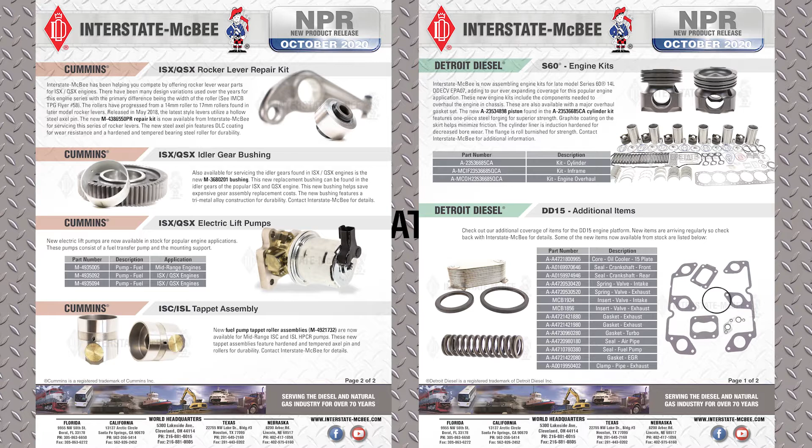So let's get started here with the October new product review. There's an overview of what we'll go over today. So we have some Detroit Diesel items and some Cummins items to talk about.

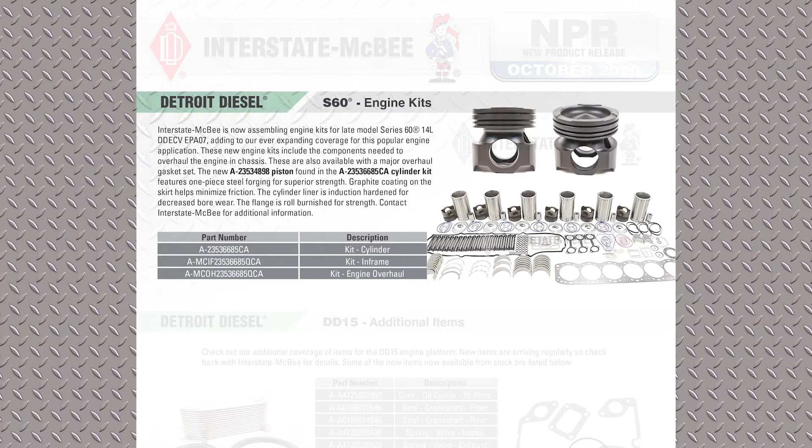The first one is for the Series 60 14-liter engine. These fit the DDEC 5 EPA 07 14-liter engine. And this is a monotherm single-piece piston. So you have a forged piston there, induction hardened cylinder liners, and all the features and benefits that we have been selling for the Series 60 for a number of years. This is just the later iteration of that engine. If we don't have the best coverage in the industry now, we're certainly close to having complete coverage for that engine series. But again, if there's something else we need to add to our product line, please let us know.

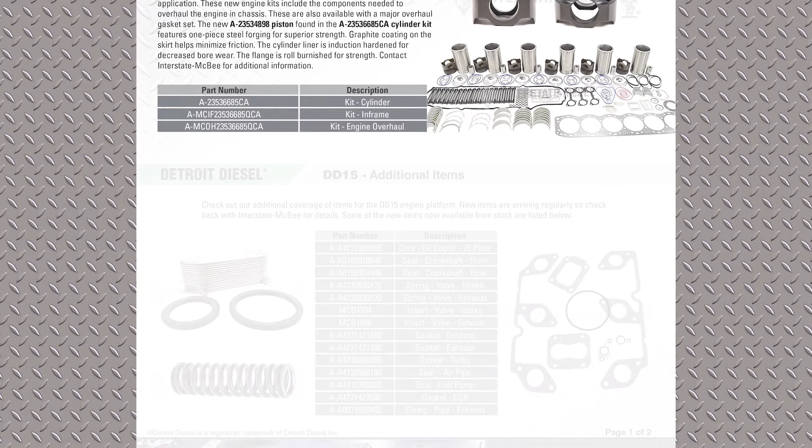Next, let's talk a little bit about DD15. We've added a lot of items for that engine, so this is just kind of a catch-up list for the highlighted parts that have been added. There's some crank seals on there. There's an oil cooler core. The inserts are going to be a good product, I think. So let's just talk about those for a second.

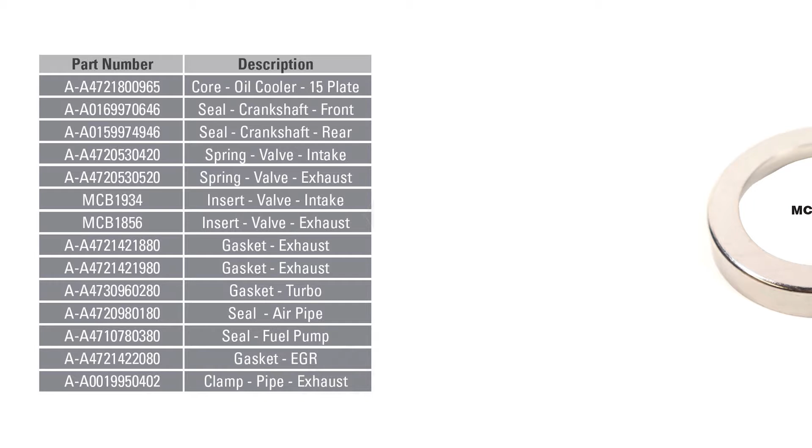The DD15 cylinder head, the OEM does not offer many traditional replacement parts for that head separately. So if you're changing valve guides, which are high wear items, obviously, and the valve inserts, you cannot purchase those from the OEM. So we developed the MCB 1856 and MCB 1934 valve seats for that reason. And they're pictured there upside down, but you can see them.

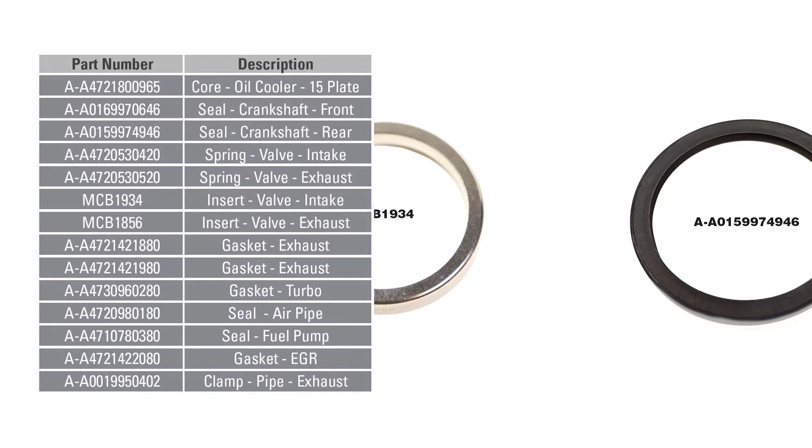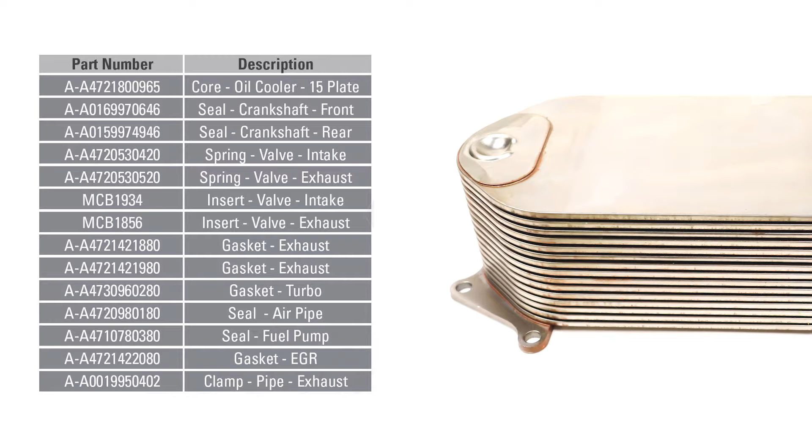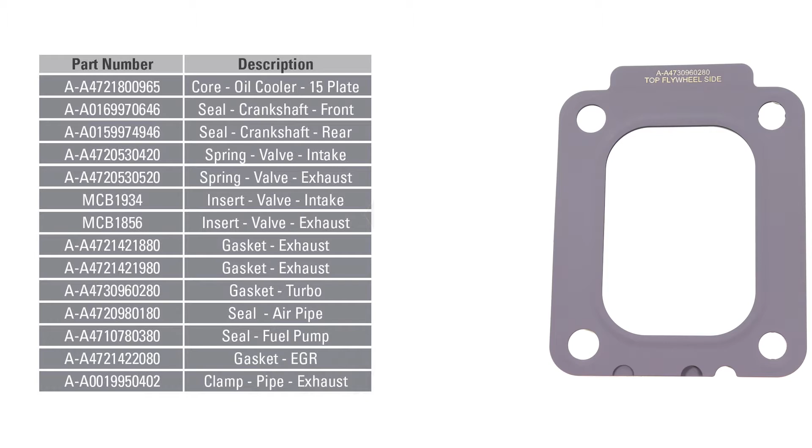Also, we have the crank seals, which is a directional type seal, PTFE design. We also have the oil cooler pictured there. It's a 15-plate cooler, which is the most popular. We also have the turbo mounting gasket, which is somewhat unique. It's a multi-layer steel gasket. And for whatever reason, the OEM wants that oriented the way we have it stamped there. So that's the turbo mounting gasket for those, multi-layer steel.

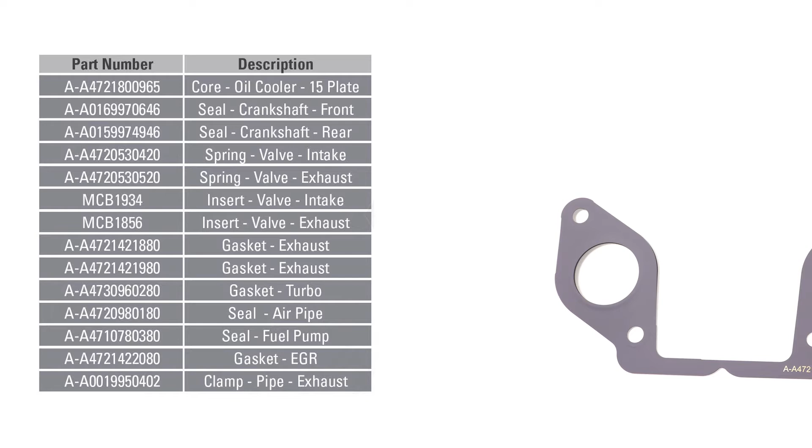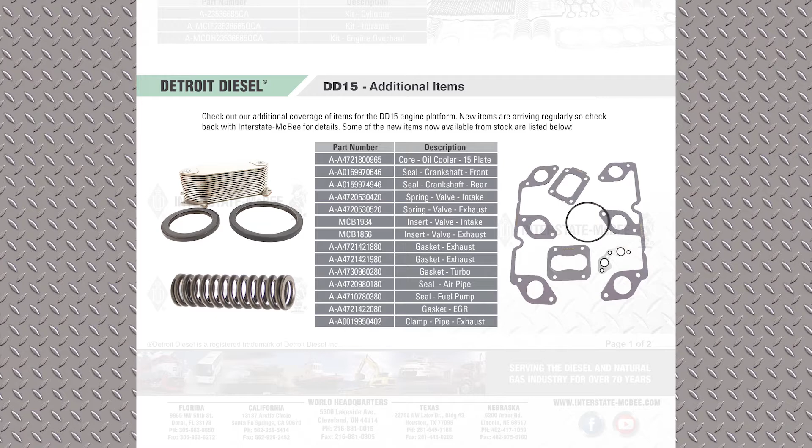The exhaust manifold gaskets are shown there. There's two different part numbers for them, for the front half of the engine and for the back half of the engine. Those are also multi-layer steel. We also are going to be offering, if we don't have them already, the water manifold gaskets, which are often changed when the head comes off that engine. So we continue to add parts for the DD15. If there's something you're looking for or something where we can develop, please let us know.

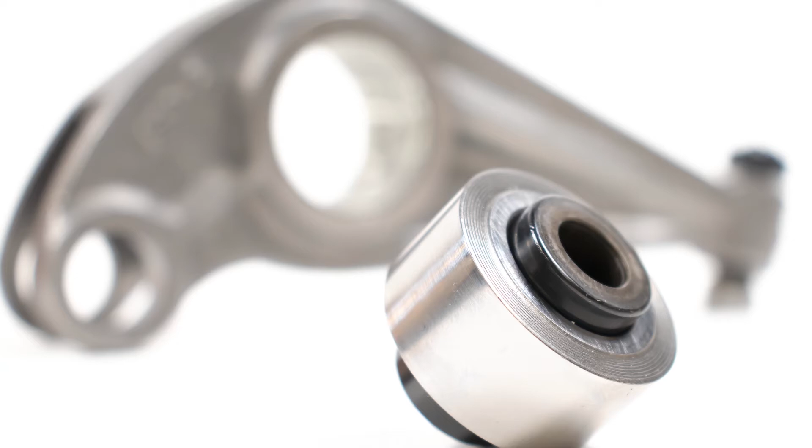Next thing we'll talk about is the ISX or QSX, the rocker lever pin and roller. As I mentioned in the write-up there, the OEM has changed that design over the years. Started with a 14-millimeter roller, they went to 15-millimeter rollers, and then they went to 17-millimeter rollers. So recently they've developed a steel axle pin, and you can see a picture of that pin there. The easiest way to tell a steel axle is it's hollow. So the earlier ones are brass or bronze alloy. The later ones have a steel axle.

What's unique about that steel axle is it's DLC coated, and that coating that you see there is similar to some of the parts we use in fuel injection. So it's a very, very thin, hard coating for durability. Joe, what's DLC stand for? Diamond-like carbon. So there's a sequence of arms that take DLC. I'm just going to skip ahead here.

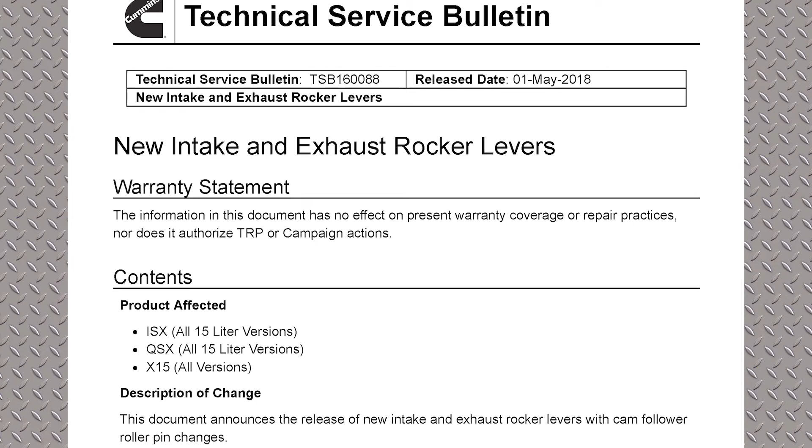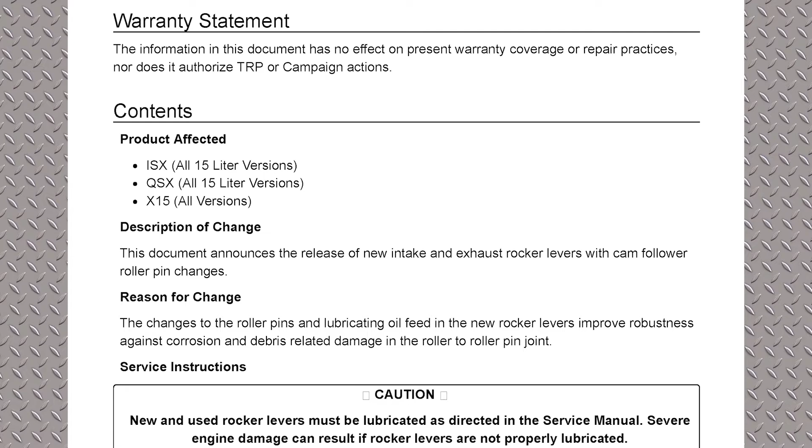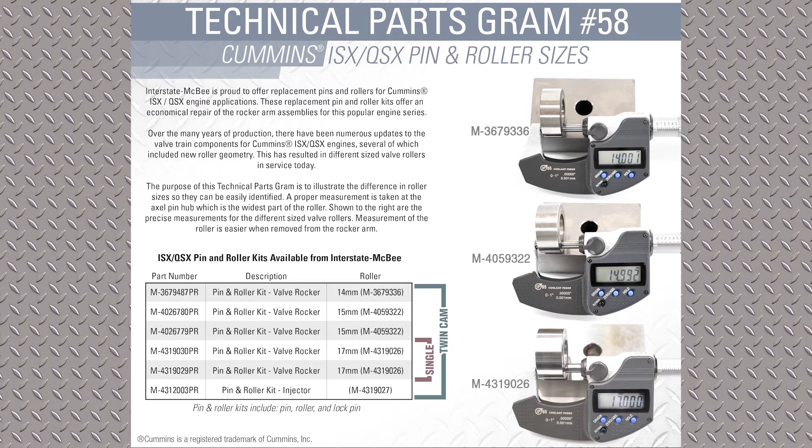The original arms were released in TSB 160088 in May of 2018. And that was the first release of the steel axles. This particular series of arms, 405-9353, and there's 6 different arms for these, have already updated to 547 part numbers. So Cummins continues to, let's just say, make improvements to the top end of this engine. And this steel pin is our latest service kit to repair those engines. We're going to add the new pin and roller kits to this TPG number 58. So we'll put out a revision to this as soon as we can get to it. The roller is 17 millimeters in that kit, so it would be similar to the one shown here.

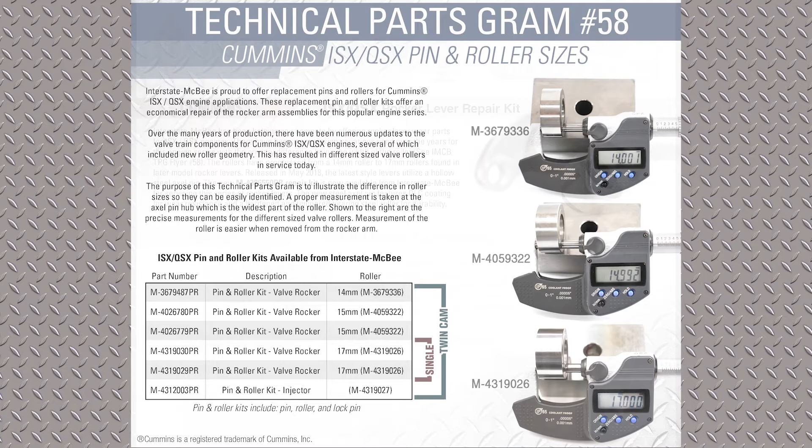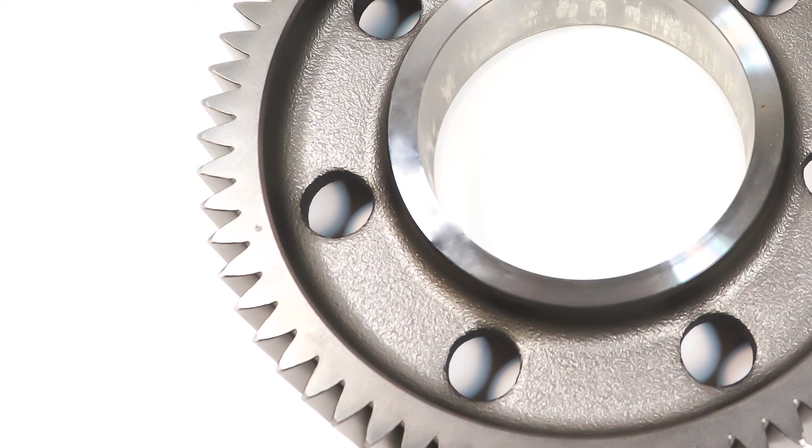Next, let's talk about additional ISX, QSX idler gear bushings. And this is the bushing. There's two big idler gears that go in the front of that engine that drive the accessories for it, drives the cam, drives the pumps and whatnot. And the gears look virtually identical. There's two different gears, but this bushing is the same for both, the 368-0201. What I'll mention on this, that bushing is not available from Cummins. You have to buy the entire gear assembly. So that bushing helps if you need to change those bushings in that gear, because that's what wears. We do offer those as a service part.

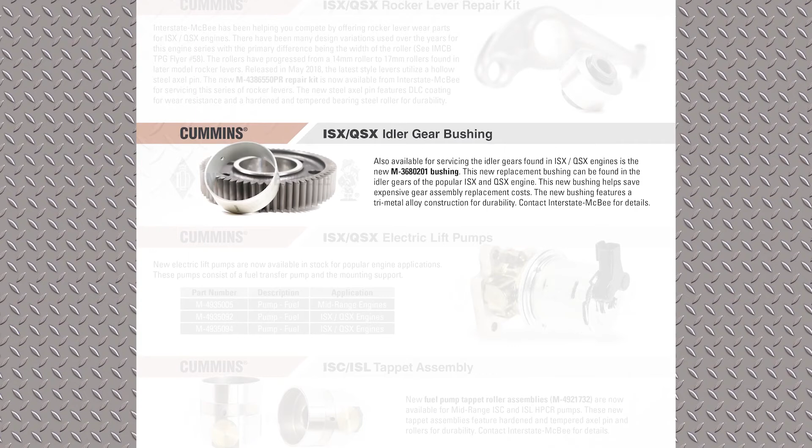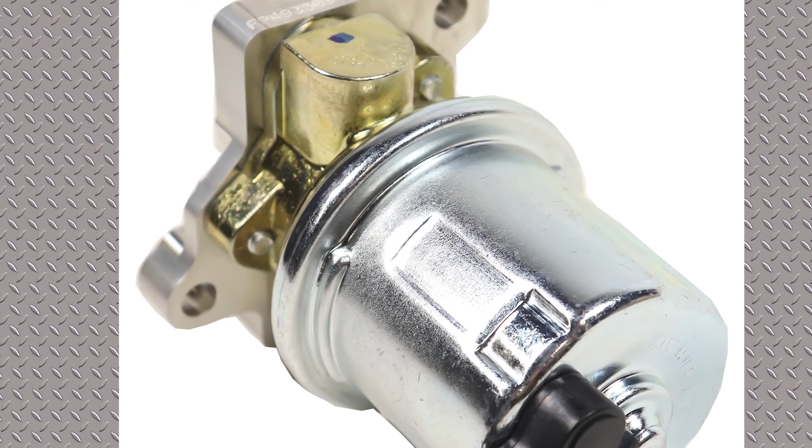Next, we'll talk about the lift pump for the later style engines. There's two different lift pumps. There's actually four different ISX lift pumps, but I'm just listing the most common ones. These are for truck engines, 493-5092 and 493-5094. And those pumps come with the base assembly, and then there's an electrical connection that hooks into the wiring harness for the engine, and that's the lift pump. So in other words, it's a fuel transfer pump. It's not the pressure pump.

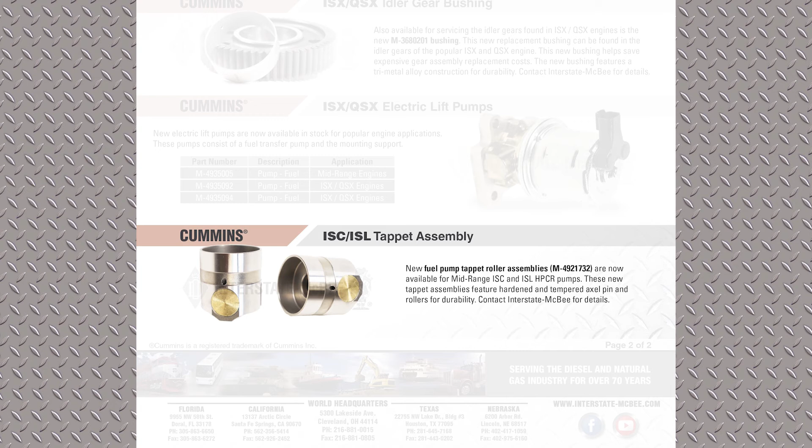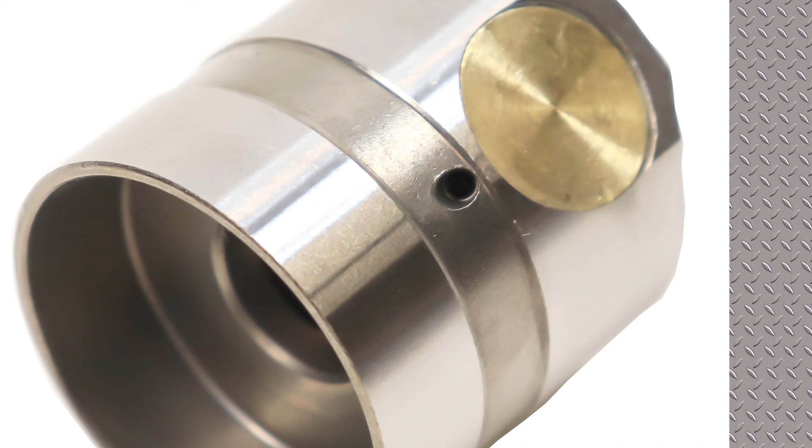And then last item, for the Cummins mid-range ISC, ISL, we have the fuel pump tappet, which is the tappet for the high pressure pump for those little engines. That's got a new body, new axle pin and roller, and the pin and roller obviously are precisely engineered for the pressures that pump sees. We are developing some gaskets and seals for that pump as well. But this is the first item we're offering for that high pressure pump for ISL and ISC.